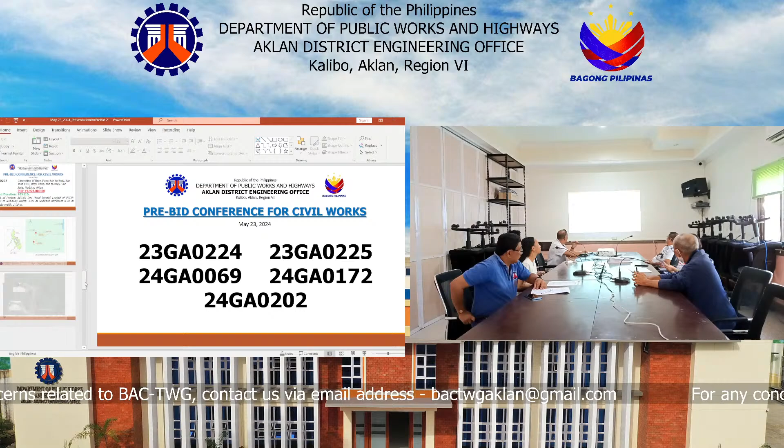Here's the list of projects for today's opening of bid for civil works: 24GA0059, 24GA0094, 24GA0115, 24GA0141, 24GA0143, 24GA0154, and 24GA0199.

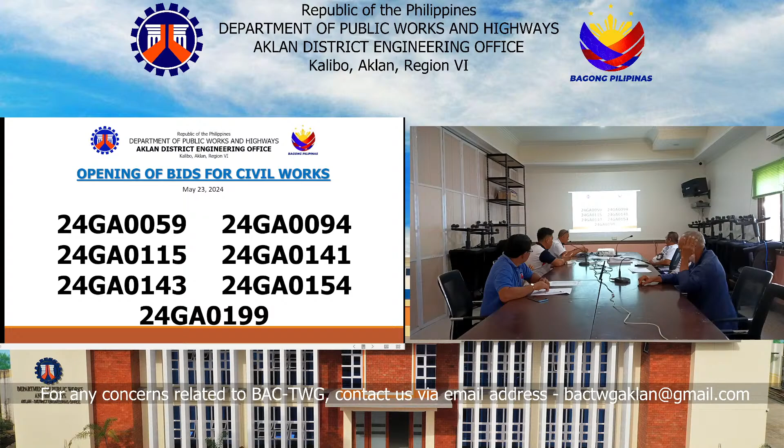Lord, thank you for this wonderful time as we gather in your name as we conduct our pre-bid conference and application process. Guide us, Lord, and help us to be able to understand and follow the government procurement law in all stages of business. Create in us, O Lord, the desire to be more dedicated and committed to our duties and responsibilities. Teach us to be more responsive to the responsibilities of the public office. This we ask through your Son, Jesus Christ, our Lord.

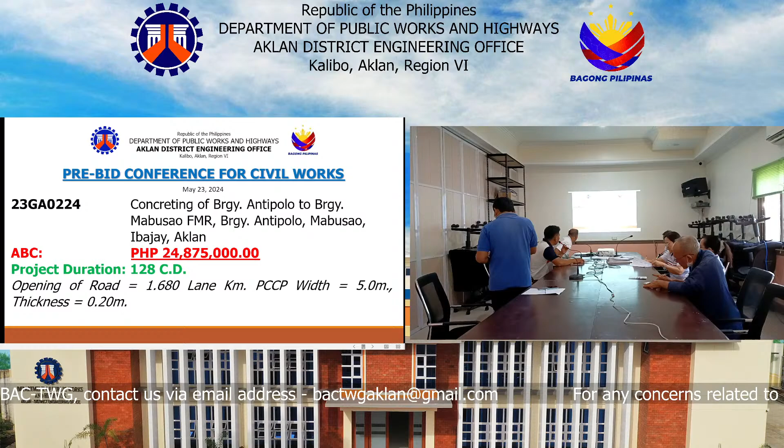Good morning, everyone. For contract ID 23GA0224, concreting of the Barangay Antipolo to Barangay Mabusao Farm to Market Road, Barangay Antipolo, Mabusao, Ibajay, Aklan, with an ABC amount of 24,875,000 and a project duration of 128 calendar days. Opening of road: 1.68 lane kilometer, PCCP width 5.0 meter, and thickness 0.20 meter.

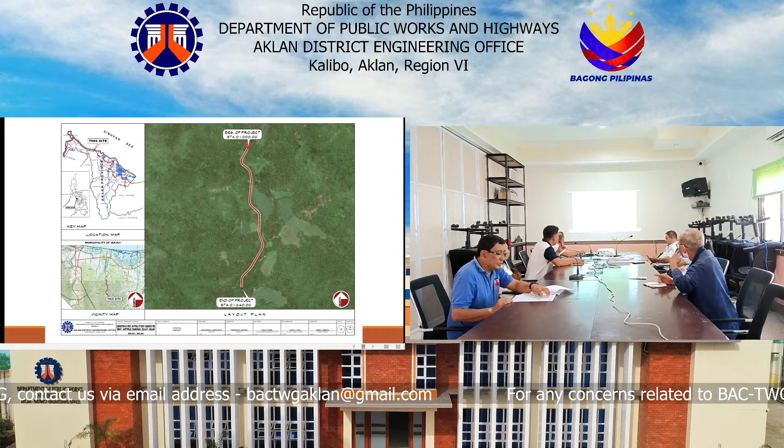That's the layout plan, the vicinity map, and the location map, the typical road section, and typical road section 3.

Next, for contract ID 23GA0225, concreting of the Sitio Butong Farm to Market Road, Barangay Laserna, Nabas, Aklan, with an ABC amount of 24,875,000 and a project duration of 192 calendar days.

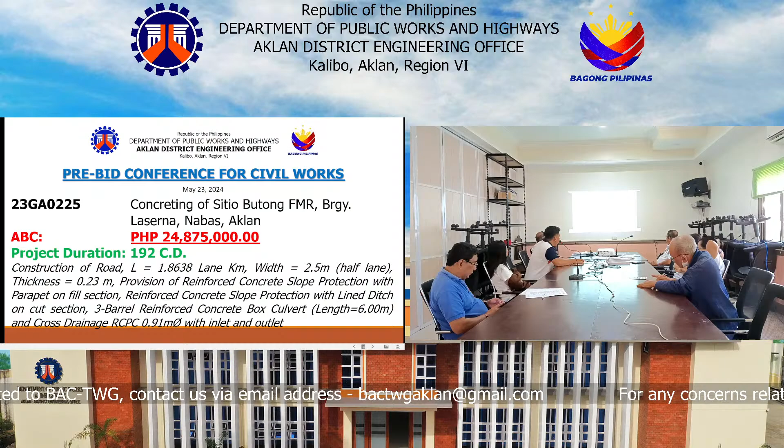Construction of road with a length of 1.8638 lane kilometer, width of 2.5 half-lane, thickness 0.23 meter, provision of reinforced concrete slope protection with a parapet on fill section, reinforced concrete slope protection with lined ditch on cut section, 3-barrel reinforced concrete box culvert with a length of 6 meters, and cross drainage RCPC 0.91 meter diameter with inlet and outlet.

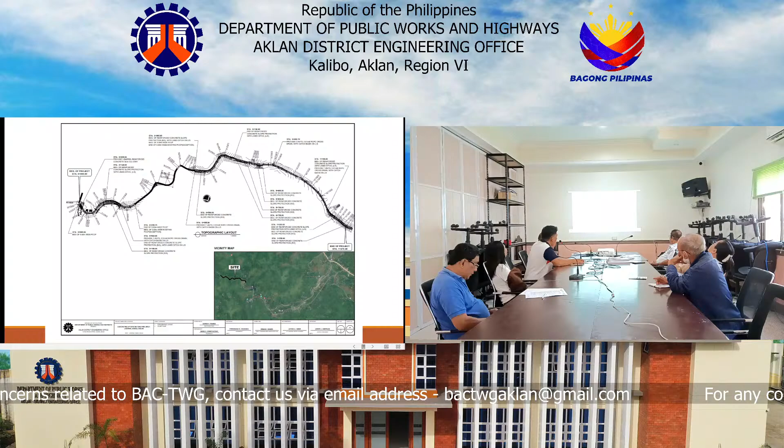Showing the vicinity map and the topographic layout, the typical road section, and the standard plan.

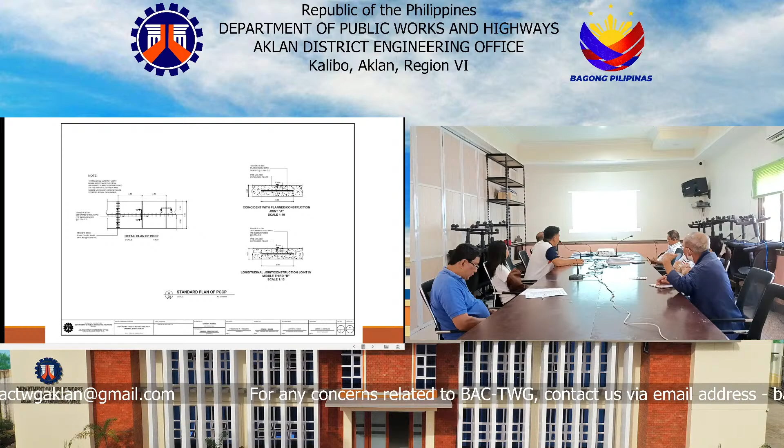For contract ID 24GA0069, construction/completion of Multipurpose Building 1, Barangay Poblacion, Kalibo, Aklan, with an ABC amount of 6,930,000 and a project duration of 180 calendar days.

For the cover court, aluminum glass door, swing type: 1 unit each of door 1, door 2, door 3, and door 4.

Completion of plastering and painting works of the cover court with 1,740.88 square meters of cement plaster finish and 1,781.38 square meters for painting works. Masonry concrete: 6 units of 5-meter length CHB wall at left elevation. Provision of 3 sets of industrial ceiling fans with 9.84 feet fan diameter and 43 kilogram fan body weight with complete accessories including steel support. Removal of existing structures including 32 concrete columns with combination of concrete and steel fence.

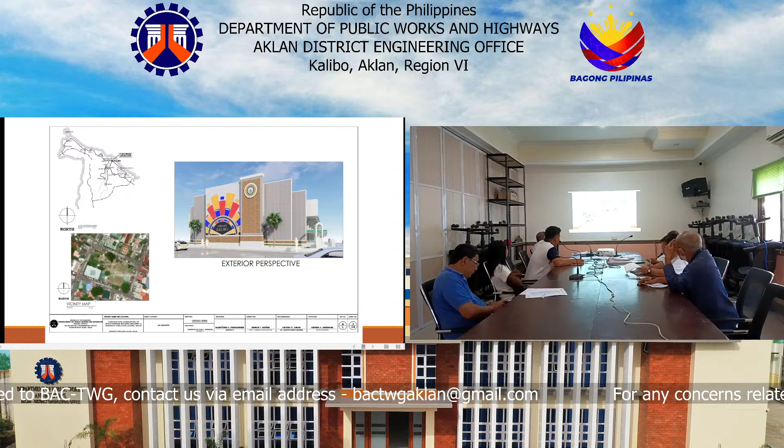That's the location map, the vicinity map, and exterior perspective; the site plan, the floor plan, the front elevation and left side elevation, the rear elevation and right side elevation.

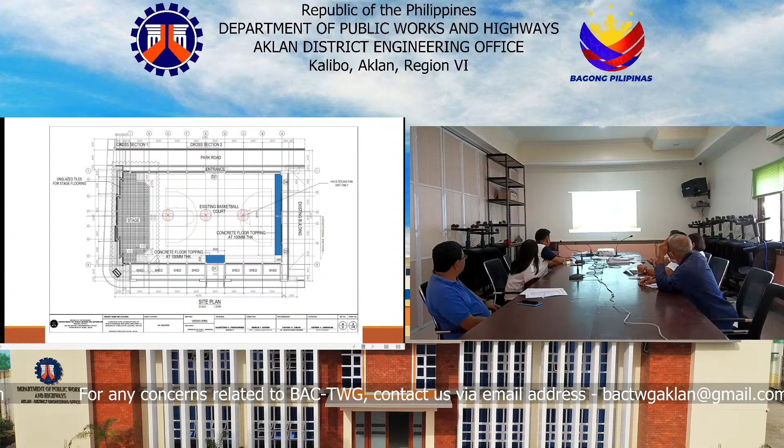Next: 9.8 feet. Provision of 3 sets of industrial ceiling fans with 9.8 feet.

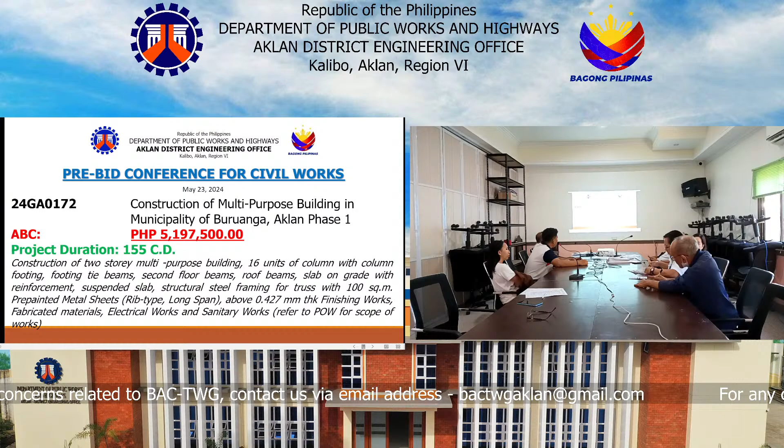construction of a multipurpose building in the Municipality of Buruanga, Aklan, Phase 1, with an ABC amount of 5,197,500 and a project duration of 155 calendar days.

Project description: construction of a 2-story multipurpose building with 16 units of columns with column footing, tie beams, second floor beams, roof beams, slab on grade with reinforcement, suspended slab, structural steel framing for truss with 100 square meters of pre-painted metal sheets, rib type, long span, above 0.427mm thick. Finishing works, fabricated materials, electrical works, and sanitary works.

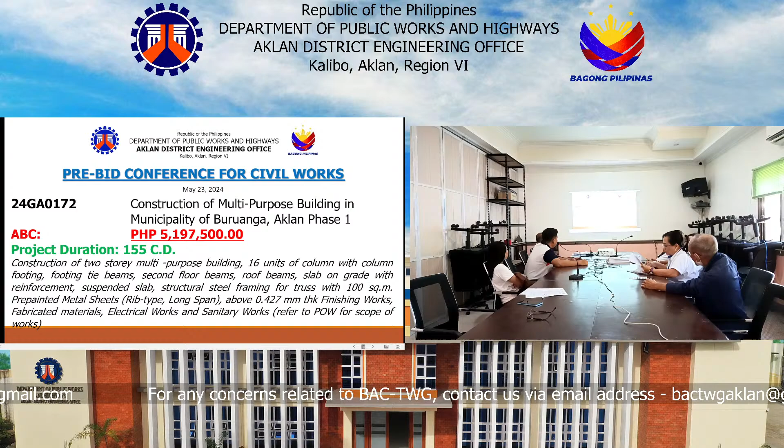Refer to the scope of works. Showing the perspective and the location map, the ground floor plan, and the second floor plan.

For contract ID 24GA0202, concreting of Barangay Pang-itan to Barangay San Jose FMR, Barangay Pang-itan to Barangay San Jose, Madalag, Aklan, with ABC of 40,925,000. Project duration 102 calendar days. Length of project: 860.86 linear meter total length. Length of PCCP 740 meter, roadway width 5 meter, subbase thickness 0.20 meter, shoulder width 1 meter.

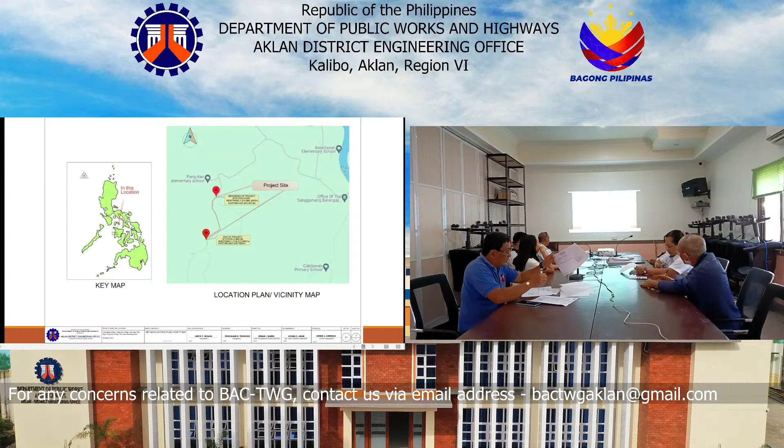On screen is shown the key map, location plan, or vicinity map, the topographic layout plan, and the plan and profile.

Any clarification or question regarding this briefing? If none, let us proceed. Thank you, planning design section.

Prospective applicants who wish to participate in the bidding are encouraged to enroll in the DPWH Civil Works Registry, or the CWR, at the DPWH Procurement Service, 5th floor of DPWH Building, Bonifacio Drive, Port Area, Manila, while those already enrolled shall keep the records current and updated. The contractor's eligibility to bid on the project will be determined using the DPWH Contractor Profile Eligibility Process, or the CPEP, and subject to further post-qualification.

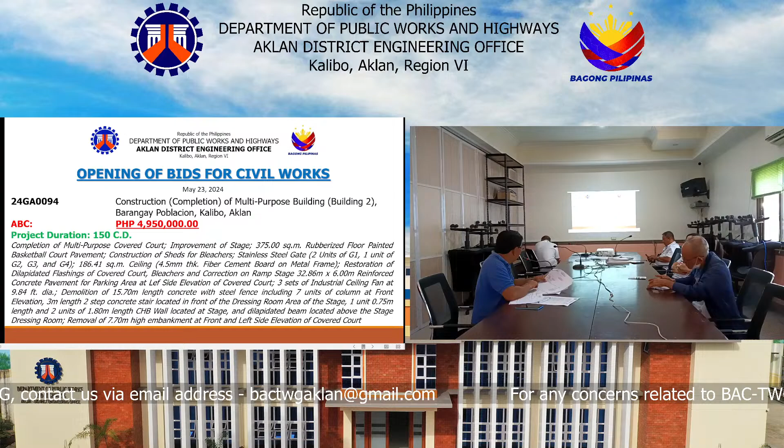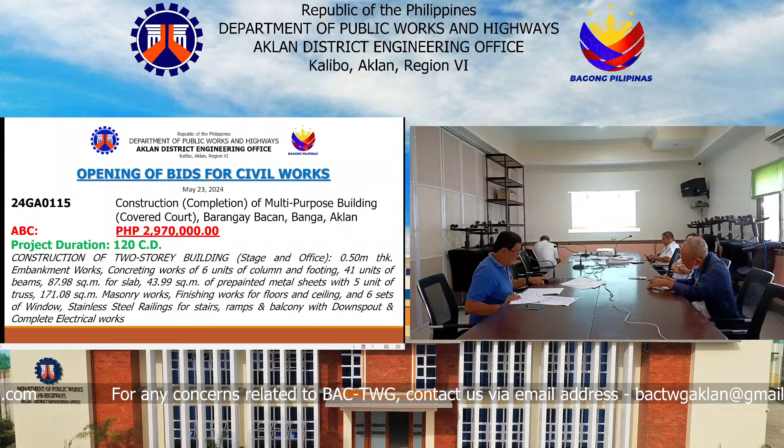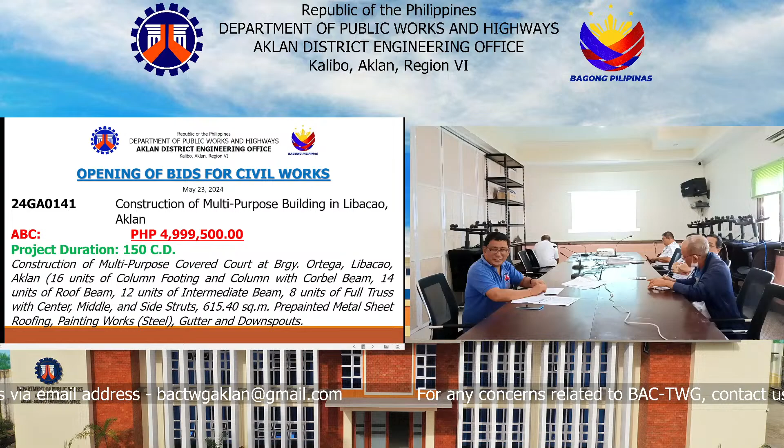Open the box. Second.